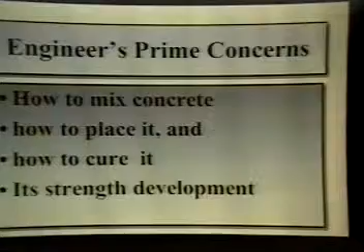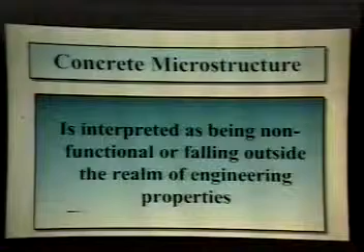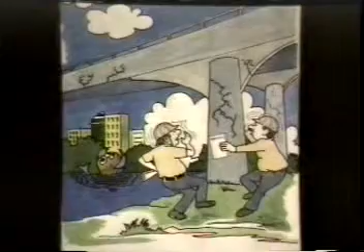The engineer's prime concerns are: how to mix concrete, how to place it, how to cure it, and to monitor its strength development to see that it achieves the desired level. Correlation between concrete microstructure and performance of concrete receives very scant attention. As a matter of fact, concrete microstructure is interpreted as being non-functional or falling outside the realm of engineering properties. The subject of my talk today is to stimulate awareness among you, ladies and gentlemen, about what microscopy and microstructure, concrete microstructure, can do in troubleshooting problems.

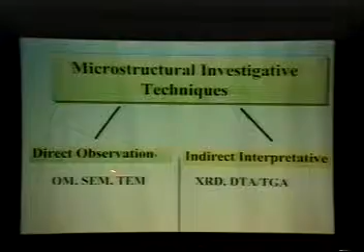And when I say troubleshooting, this is the type of problems I mean. I tend to divide the investigative techniques into two broad classes: direct observational techniques - optical microscopy, scanning electron microscopy, and transmission electron microscopy - and indirect interpretative techniques - XRD, DTA, TGA. Today, we're going to concentrate on the direct observation techniques.

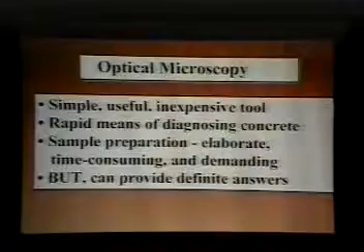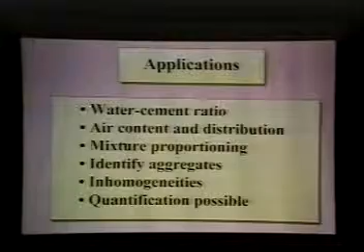Optical microscopy, the first technique, is very simple, useful, and an inexpensive tool to use. It provides rapid means of diagnosing concrete problems, but sample preparation is elaborate, time-consuming, and often quite demanding. But optical microscopy can provide very definitive answers. Its applications include determining water-cement ratio, air content and distribution, mixture proportioning, identifying aggregates, finding inhomogeneities in concrete, and quantification is often possible through microscopy.

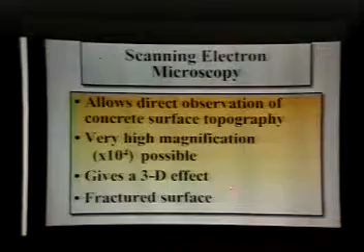Scanning electron microscopy, on the other hand, allows direct observation of the concrete surface topography. You can use a very low magnification to very high magnification. It gives a three-dimensional effect because of the depth of focus. And the advantage is you can use fracture surfaces to examine.

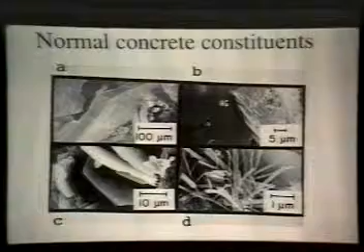A normal concrete constituents under the SEM would look like these. You have the lime crystals, calcium hydroxide, large chunky tabular crystals. You have the aggregate paste interface - this is your aggregate - with the lime crystals oriented at the interface. You have the hexagonal crystals of monosulfate and some primary ettringite needles. And of course, you have the principal binder material, which is calcium silicate hydrate with its fibrous growth. As you can see, this is a very porous concrete. It's also permeable - you can see all the channels. So it's basically a high water-cement concrete. But this is your principal binder material of concrete, calcium silicate hydrate.

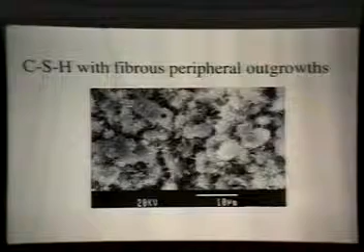Question is, what causes defects in concrete?

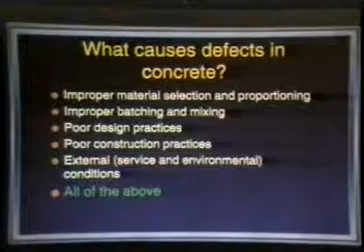Actually, problems in concrete start before you even place it, in the selection of materials, proportioning, batching and mixing, design practices, construction practices, and of course the environment plays an important role. It can be a combination of some or all of these factors.

Let's start with some improper aggregates. What would they look like? They could be highly elongated, poorly gap graded, dirty, alkali reactive, or very porous aggregates.

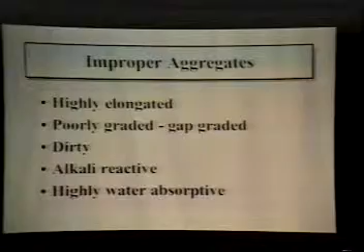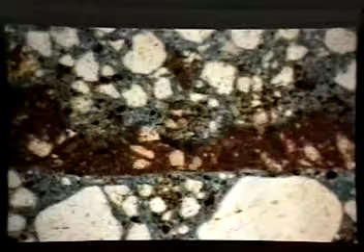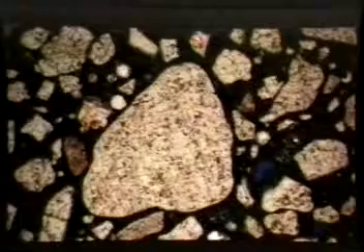Gap graded aggregate: you have the coarse fraction of the sand, the fine fraction of the sand, but the medium fraction is deficient or missing.

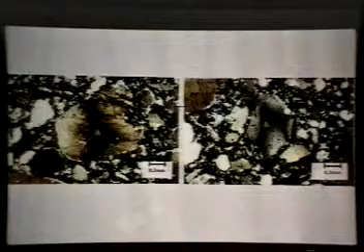Reactive aggregates, strained quartz. This is the extinction of the quartz. If you move the polarizer a little bit, you will see a very short extinction. This is what we call reactive or strained quartz, and it can cause alkali aggregate reaction in concrete.

What are the effects of using improper aggregates? The water demand increases, consolidation becomes difficult, you have poor paste-aggregate bonding, and eventually it reduces the strength in concrete.

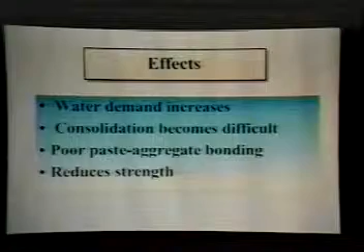Quality assurance failures. Let's look at some of these.

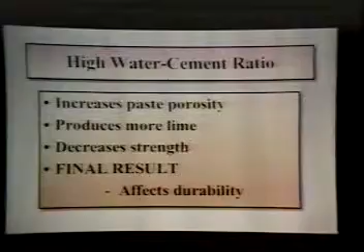A very common problem is a high water cement ratio in concrete. It increases the paste porosity, produces more lime crystals, and decreases strength. The final result is that it affects durability.

This is the difference: this is a high water cement concrete, and this is a dense paste with a low water cement concrete. A blue dye is used to measure the water cement ratio from the blue coloration.

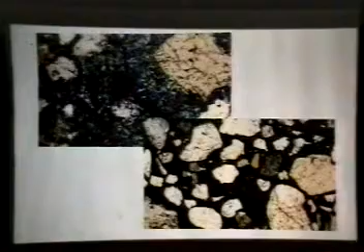Consolidation voids. Inadequate consolidation can lead to large voids and a decrease in strength in concrete.

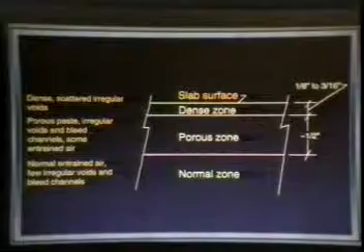If you study it carefully, you will see a dense zone, a porous zone, and then a normal zone. This is mainly related to some finishing problem.

The problem arises when you have agglomeration of all these, leading to high air content in the concrete, which reduces the strength quite drastically.

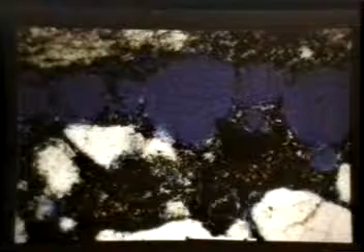Additionally, when you have concentration of air voids at the aggregate interface, it reduces the bond strength of the paste-aggregate bonding.

Retempering is a very common fault. You can see a distinct gradient: a very dense paste and an extremely high water cement paste. This means adding excess water later on. Normally water is added at the job site, but when too much is added, you get this gradient in the water cement ratio in the concrete.

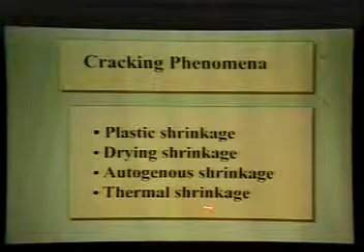Cracking phenomena has generated a lot of research these days, because with fast track concreting practices, cracks can be a problem. There are different types of cracks: plastic shrinkage cracks on the surface, drying shrinkage, autogenous shrinkage, and thermal shrinkage. These can be distinguished under the microscope.

And then you have the thermal cracks. As you go deeper inside a mass concrete structure, you will see that the amplitude of these cracks will increase, the width will increase, and the frequency will increase.

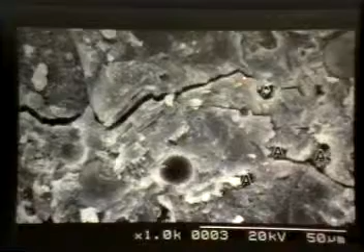This is what we mean by autogenous shrinkage cracks, as you can see under the scanning electron microscope—this is what it would look like.

And then, of course, you have the transgranular fractures, which are caused by some sort of movement. Usually when you have slab movement later on, you can have this type of cracks. Sometimes these cracks are visible on the surface, as in this case, but not always. In this case, this was what told us that there might be problems with this concrete, some cracks - just one, and here, one, two cracks. But when we investigated, we found it had a lot of these thermal cracks.

Carbonation is a reaction between lime and carbon dioxide. It can be instantaneous, or it can be time delayed. The result is calcium carbonate formation. It involves leaching of concrete constituents and therefore weakens the paste structure.

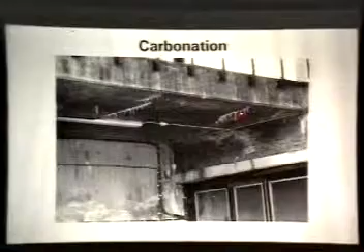This is an example of carbonation in a bridge. You can see the stalactite type of formation under the bridge - a very high water cement concrete ratio. Next, please.

Efflorescence, again, is a problem. It's a migration of salts in solution. The source can be groundwater, it can be masonry. And you have precipitation of salt on the surface, and the result is problems, weakening of the structure.

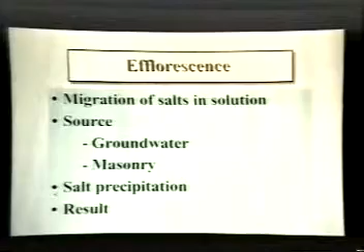Next, please. This is a brick mortar structure. As you can see, efflorescence affecting the bricks and the mortar.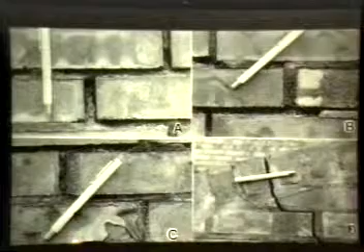Next, please. Some more examples. Here you can see efflorescence beginning. You can see the mortar eaten away. Here again you see some of those - you can see some scaling of the brick, and after the mortar has gone away, you can see the cracks. Mortar has been completely disintegrated.

Next, please. When you identify the efflorescent salt, this is one salt we found, gypsum - massive gypsum crystals. It's an expansive salt, and this is what creates the expansion and scaling on the surface of the structure. Next, please.

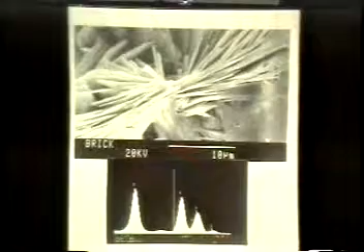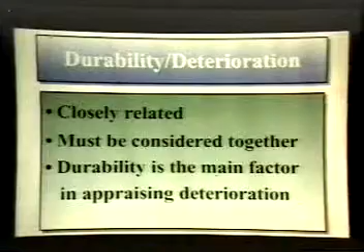Now, durability and deterioration of concrete are closely related. They must be considered together, and durability is the main factor in appraising deterioration of concrete. This is what we mean by the relation between durability and deterioration of concrete.

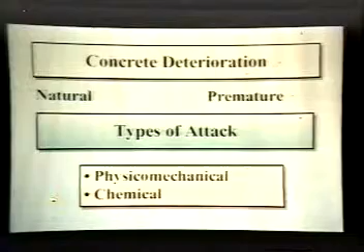I tend to divide concrete deterioration into natural - it's not an ageless material, it deteriorates over time, and this is natural deterioration. On the other hand, you have premature deterioration, and that can be due to some types of attack. It can be physico-mechanical or chemical. Physico-mechanical meaning de-icing salt, chemical meaning, for example, sulfate attack or some other form of chemical attack.

Next, please. Let's look at one case study. There was only one factor involved, but it had multiple effects. It was an overpass system which was constructed in 1965. The first major repair took place after 24 years in service. The clue here was it had undergone generous application of de-icing salt all throughout its service life.

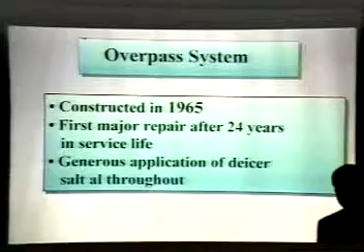Next, please. When we examined the concrete, we found salts - sulfate salts, trona, sodium carbonate, bicarbonate, and sodium sulfate salts up to the rebar level. Beyond the rebar level, the concrete was pretty sound.

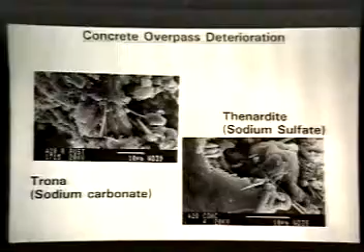And we found tremendous corrosion - can you lower the, yeah - we found tremendous corrosion at the paste aggregate interface. This is the corrosion product that we see. Next, please.

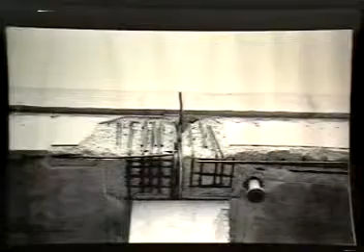This is when the repair of the bridge deck was going on, repair only up to the rebar level. And this next one shows the repair of the column structure.

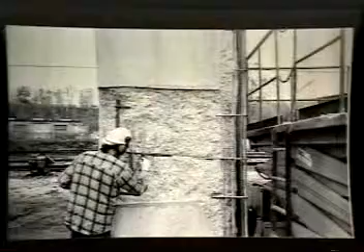So in this case, the problem was de-icing salt, but had multiple effects in the sense it had those expansive salt formation up to the rebar level, and tremendous amount of rebar corrosion. Talking about rebar corrosion, very little is reported on the microstructural characteristics of rebar corrosion, although it is often the key to concrete deterioration. As a matter of fact, in reinforced concrete, failure often stems from corrosion of rebar.

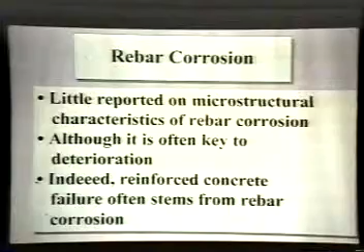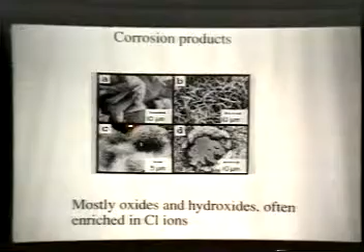Some of the corrosion products typically look like this. You have the tabular crystals, the lamellar crystals which I showed you, and the delicate whiskery globular structures, which upon exerting mild pressure break. These are the types of crystals which cause major problems, exert tremendous amount of pressure, and therefore cause disintegration of the concrete at the rebar paste interface.

They are mostly oxides and hydroxides of iron. They are often quite rich in chloride ions, maybe from the de-icing salt, or from, if it's a marine structure, from chloride ions from the sea.

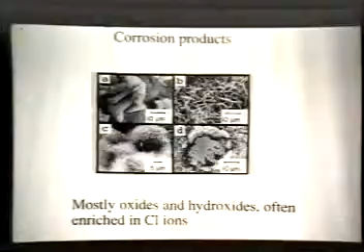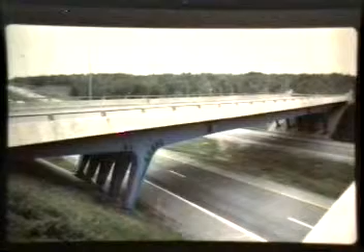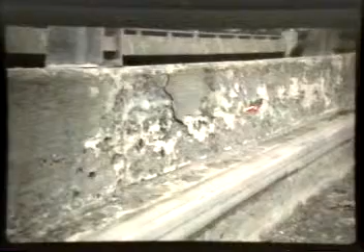Another case study, looks can be very deceptive even in concrete. A bridge structure, you can see the outside, it's a composite bridge, concrete and steel. Here are the abutments - it looks fine from outside. When we did an inspection of the interior parapets, this is what we saw. Somebody had repaired it at some stage. When we started breaking it, we found it just falling apart everywhere.

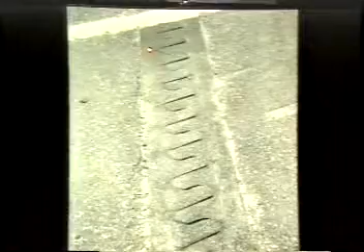Closer examination showed quite a network of map cracks in the concrete. We also saw that the expansion joint had closed completely. This was a very worrying factor actually.

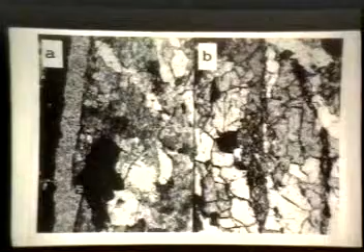This had alkali aggregate reaction when we examined the concrete, and this is what we found: reaction rim around the aggregates, polygonal cracking of aggregates. These are telltale signs of alkali aggregate reaction in concrete. And this is the alkali silica gel, which you can see going through the crack. When we identified it, this is the alkali silica gel, this is the composition of the gel, and this is what we found filling the cracks.

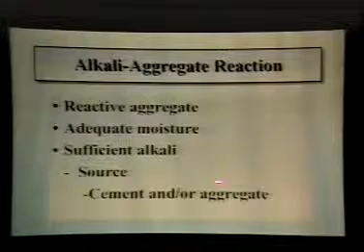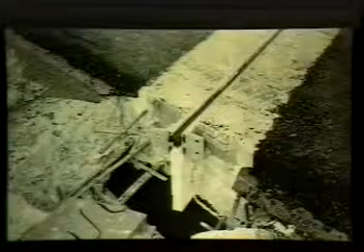Now, we found that it had the reactive aggregates. There was adequate moisture available. There was sufficient alkalis - we don't know what the source was. It could be the cement, it could be the aggregates, but there were definite signs of alkali aggregate reaction causing all the problems. One of the recommendations was to change the expansion joint - this is the old one, being replaced with a newer type.

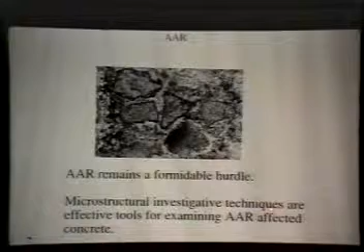Alkali aggregate reaction - this is another sign where you have discoloration rims around aggregate particles. It still remains a formidable problem. And interesting enough, microstructural investigative techniques are the most effective tools for examining AAR-affected concrete.

Sulfate attacks - two types. Again, I tend to divide into internal attack or external sulfate attack. Internal attack is a buzzword nowadays - delayed ettringite formation. External sulfate attack could be secondary ettringite or could be gypsum.

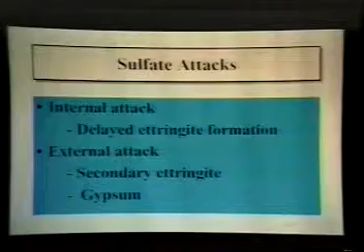This is a case of external concrete which has been attacked by sulfate. You can see all the ettringite crystals in the voids. The concrete has virtually decomposed and is filled with ettringite on the surface.

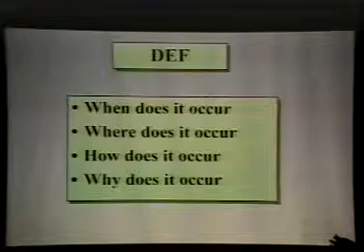Delayed ettringite formation - this is a very vast subject. When it occurs, where it occurs, how it occurs, and why it occurs - I'm not going to go into all those details. I just want to show you some examples of DEF. This was a pile structure going about 45 feet inside.

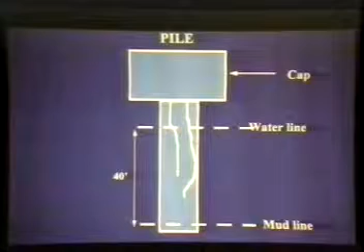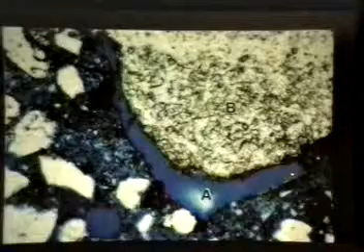When you look at the same concrete below, let's say 3 or 4 inches below, we are talking about concrete slabs, you will see that the paste has been affected. All the lime has been leached out, and the paste porosity has increased. This is all leaching. This originally was occupied by some paste constituents but has leached out. So this is what vapor transmission can do to the concrete.

To conclude my presentation, up till now, technologists and engineers have mostly relied on engineering tests to determine the quality and durability of concrete and other properties. These still remain valuable tools, but nowadays increasing attention is being focused on the advantages of using microstructural investigative techniques.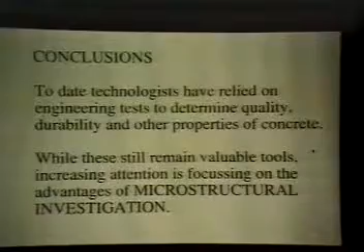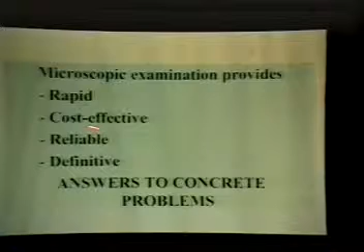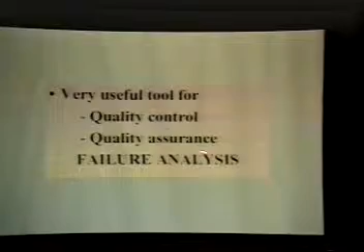I have 3 more. Microscopic examination provides rapid, cost-effective, reliable, and definitive answers to concrete problems. It's a very useful tool for quality control, for quality assurance, and for failure analysis.